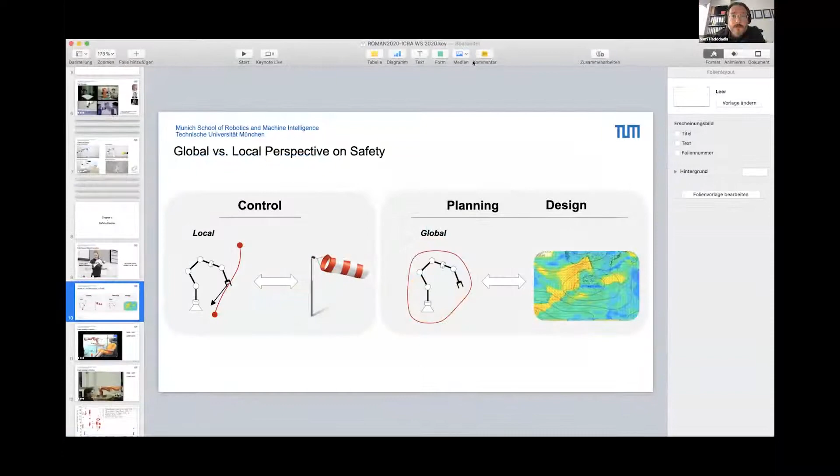Anyway, the safety work we did 15 years ago was essentially the first human-robot collaboration experiment in terms of crash testing, understanding how dangerous robots that interact with humans could be, and using standardized crash testing devices.

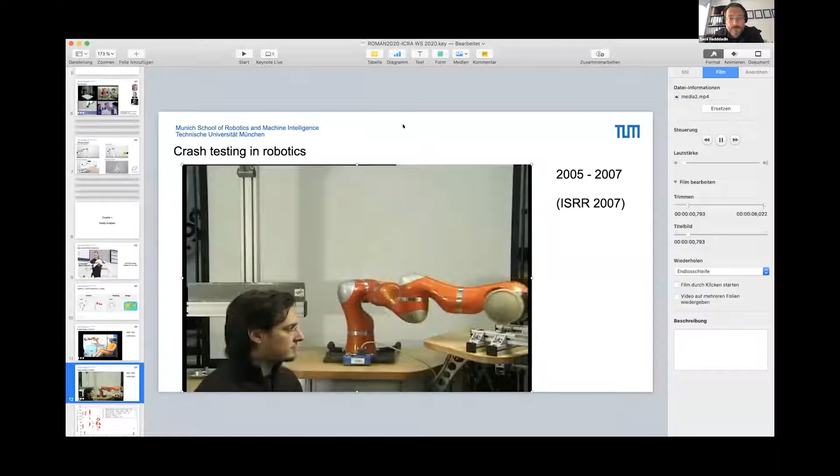We did some experiments with humans—this was me much younger and much more stupid, doing experiments like this. I guess some of you know these videos. This was the first basic attempt to understand whether robots designed for safety were actually dangerous, or fundamentally safe.

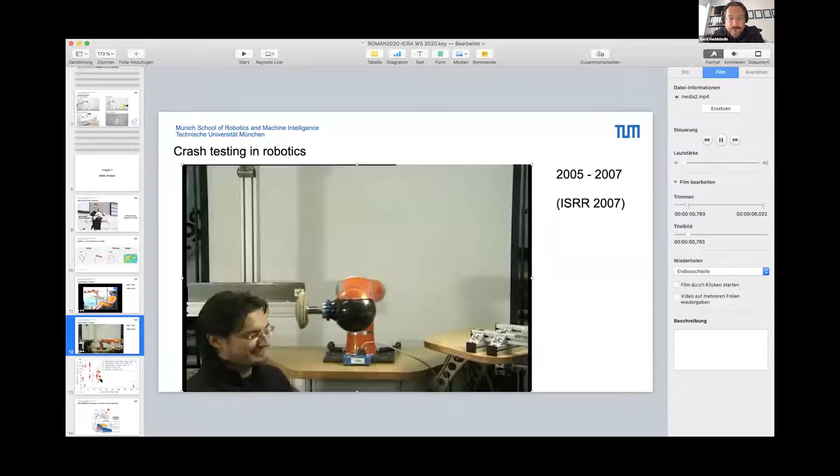We ran collision experiments trying to understand the fundamental injury that could occur in the worst case, especially in this particular case you see here.

One thing we did over the last years was to put together all the safety data that has existed for many years of injury research, not only in robotics but especially in automobile crash testing, injury research in biomechanics, and so on and so forth.

We've put together 70 years of research, more than 2,000 publications were screened that finally made it into some of the works, to try to understand: can we actually leverage all that knowledge in biomechanics research and put this together into one map that lumps together impactor mass and impact velocity, and what injury would occur by means of what we call quantifiable biomechanics-based injury rating.

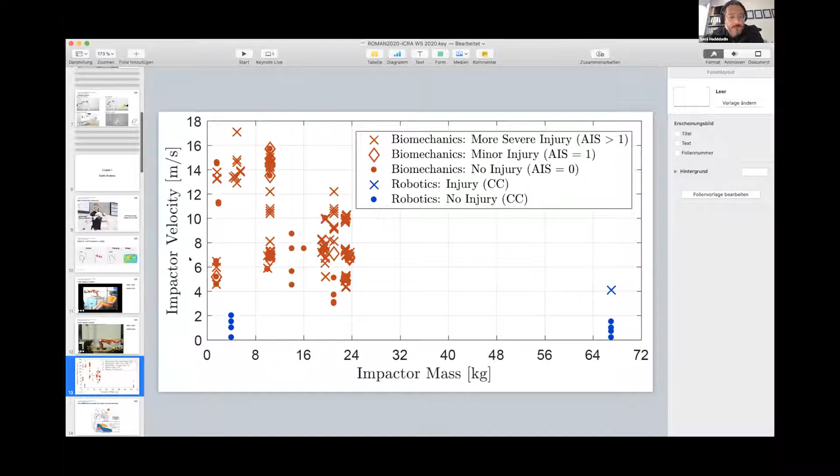This idea of trying to understand impact velocity and impact mass and putting them into one fundamental framework is what we call the safety map or the mass velocity scale. It essentially puts the robot dynamics into one plot, which we published two years ago, combining the robot velocity and the robot reflected mass into one dimension, and the other dimension is the human body part, which runs through this understanding of human injury and can be plotted into the same plot.

The intersection between these two areas is where this particular robot can, in principle, harm that particular body part. This brings together human injury understanding and robot dynamics into one representation that is fundamentally physically motivated, without any fundamental assumptions or the kind of weird calculations we've seen over many years on how to bring these two together.

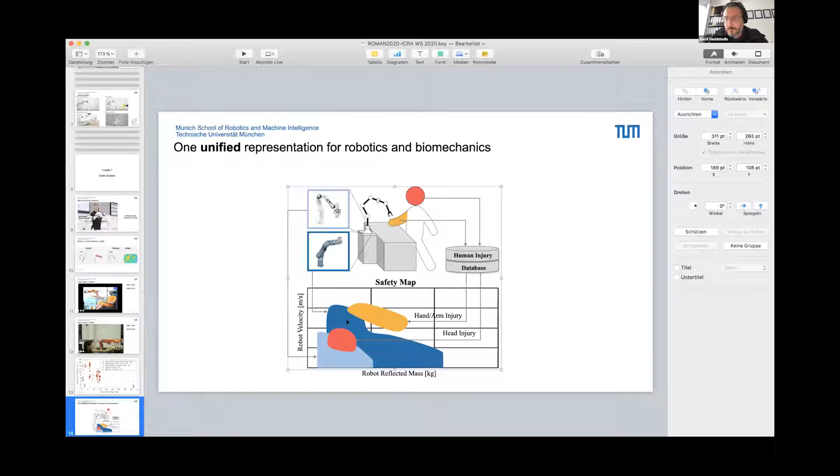This really unifies on very fundamental energetic properties, which gives us the chance to understand the global properties of a robot. Here are two examples: the lightweight robot 3 we did back then at DLR, and the Puma system, plotting the inertial properties and putting them together with the fracture forces of the frontal bone of the human forehead.

What we see here is that for this particular surface we're assuming in this case, no injury can be generated according to all existing biomechanical data for the entire range of motion, given in this particular example with no additional payload for the robot.

This shows that you can bring them together at the design level. You can plot the inertial properties of a robot over its entire workspace and then intersect this with biomechanical injury data. This gives you a notion of how dangerous a robotic design fundamentally is in its inertial, velocity, and impact curvature properties.

So now that we have some tools for making robots safer in motion and in design — which I unfortunately couldn't show you in all the pictures, but I think the idea became roughly clear.

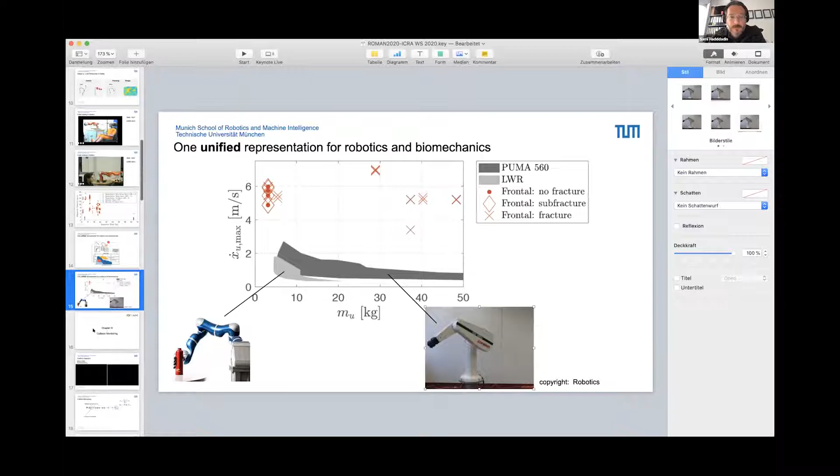One very important aspect is the monitoring of collisions, which many of you have probably seen before. Many years ago, we did basic monitoring work, collision detection and reaction, based on what we call the Momentum Observer, together with Alessandro De Luca, for dynamic impacts but also very sharp impacts.

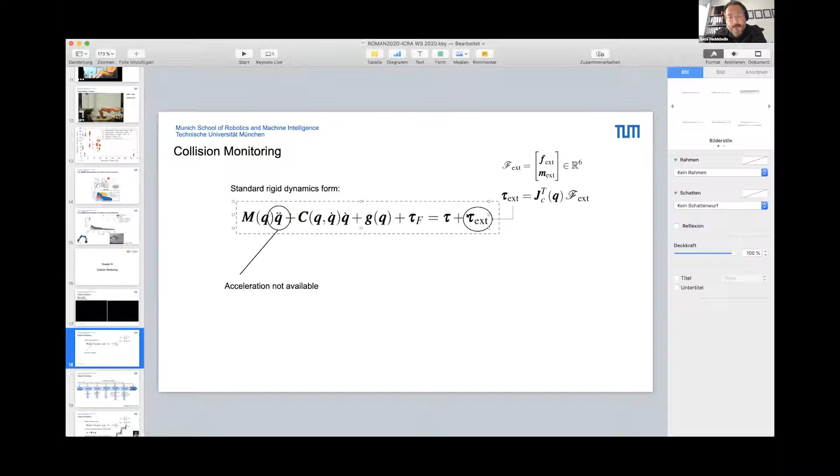The idea was essentially that instead of solving the dynamics equation algebraically using inertia, we put together a so-called momentum observer. Because we don't typically have acceleration available in robots, it estimates the external torques from external collisions via this momentum observer, giving us a pretty accurate estimation of the external torques in generalized space for all the monitoring and estimation you've seen so far.

A couple of years ago we introduced the so-called collision monitoring or collision event pipeline, which tries to bring organization to the whole problem from pre-collision to post-collision: starting with detection, isolating the contact, monitoring the contact forces over time, then classifying and reacting to it, which is somewhat a low-level machine learning and planning problem. We've been doing these things from the beginning.

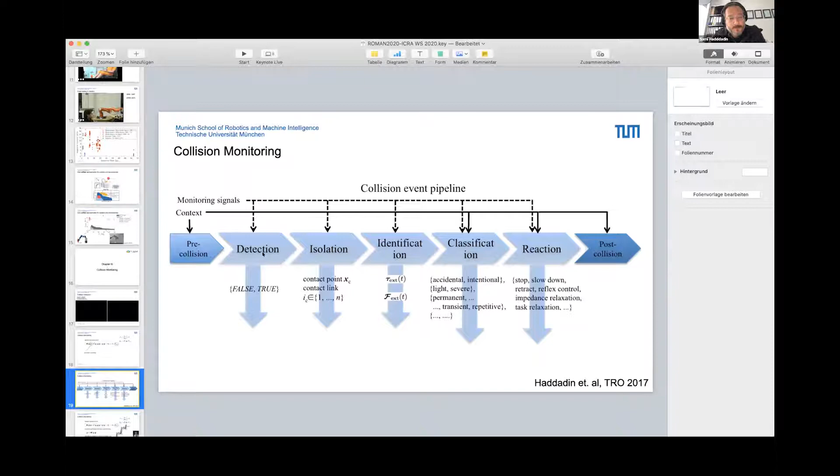However, there's still a lot of work that needs to be done. But I think so far it's safe to say detection, isolation, and identification were roughly solved, also commercially, and have been introduced into all kinds of commercial applications on different robots.

Here you can see some of the basics. Instead of just using Lagrangian dynamics, we reformulate everything into momenta space, introducing what we call a momentum observer — essentially a reduced order disturbance observer in nonlinear form.

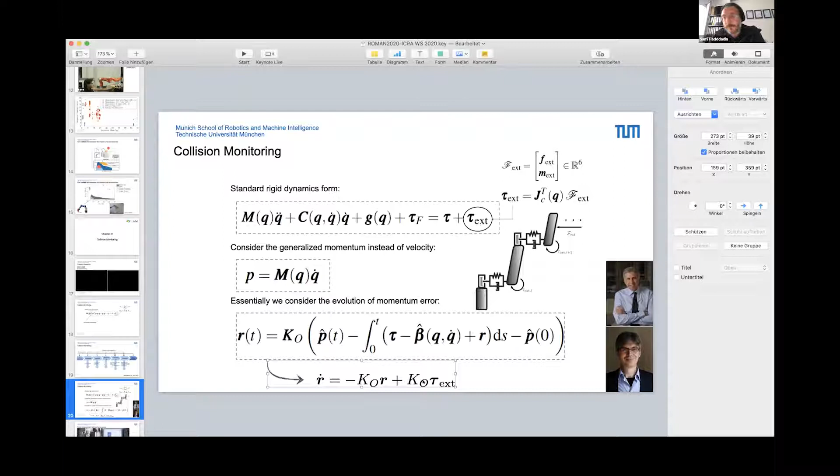And then what you can show, if your models are quite accurate, is that without the need of acceleration measurements, you end up with an estimator that essentially gets the external torques as a first order filtered version. So as nice as it gets, given that you have no acceleration measurements, what you can get is essentially very accurate contact measurements with this system.

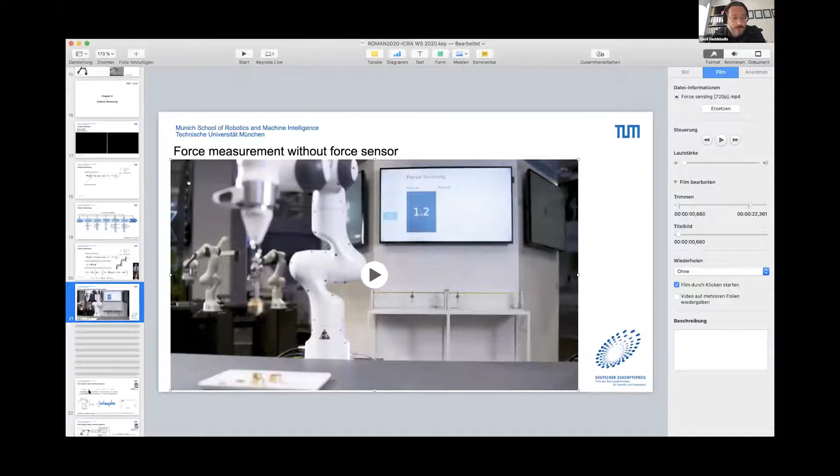However, if you look at these methods, what you typically get is some limitations, even though they work also on a very nice practical level. They typically have some noise, which gives you some thresholding and also some lagging, because it's a first order system we obviously get some lags, so non-ideal behavior in terms of collision detection and monitoring.

So we did put some work into trying to understand: can we, instead of using this classical observer-based method, actually shoot for the direct method? Obviously we all know that we don't have acceleration measurements in the systems. So we asked ourselves, what can we do in order to get rid of this whole observation, lagging, and thresholding problem?

And obviously the solution sounds a bit naive, however it was technically not that easy: to get some accurate estimation of the velocity and the acceleration in the joints, and then basically use the algebraic estimation of the external torques. However, numerical differentiation has been a problem for many years, and this obviously increases the uncertainties in the residual R. So we need some large thresholding and filtering compared to what could be ideally possible, especially in high dynamic collisions.

So what we came up with was essentially a new way of looking at the acceleration, and we essentially tried to make use of IMU measurements to get, via a nonlinear estimator, fusing with standard proprioceptive sensing, an estimate of the velocity and the acceleration as accurate as possible.

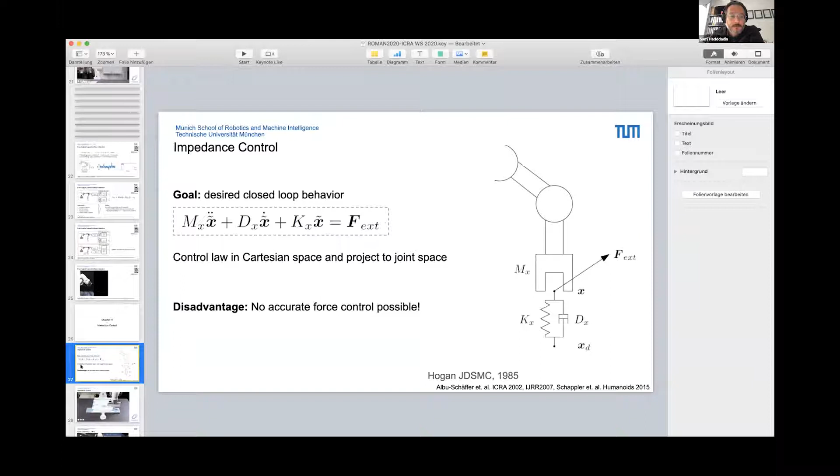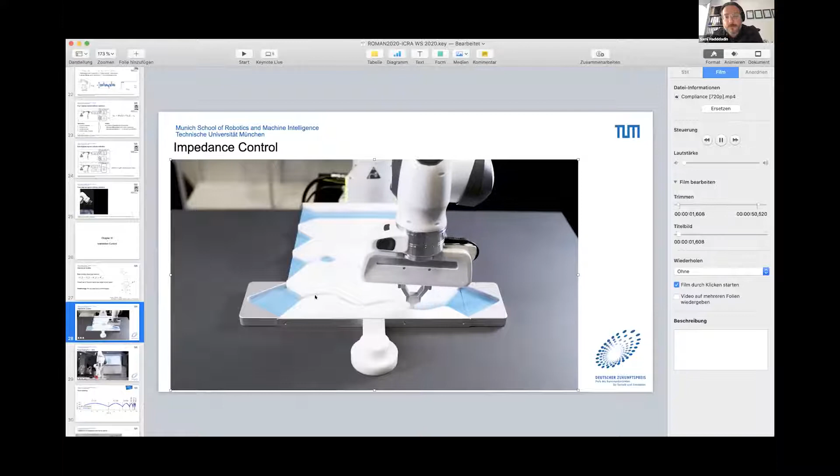The fourth part I want to talk about quickly is interaction control. We all know works like impedance control and admittance control. However, one of the main limitations of these works is that, despite we can essentially be compliant without knowing the environment, which is obviously a very nice property of a robot, there are still issues.

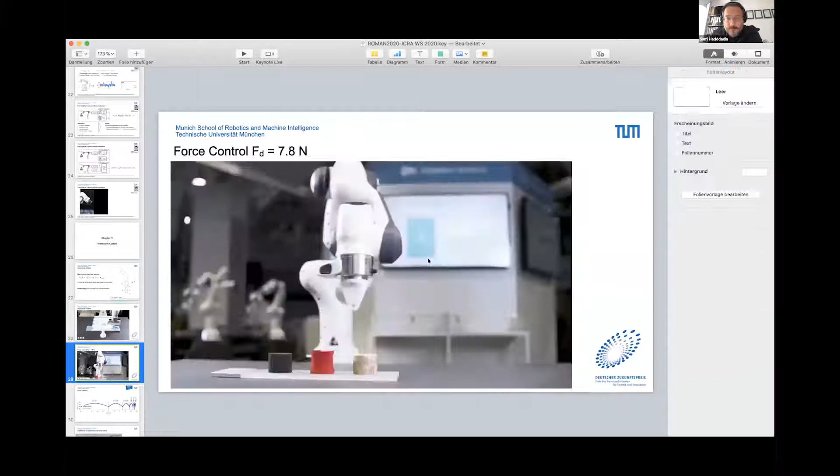We can obviously do force control also with these systems, regardless of the compliance of the environment, which obviously in interaction with humans is very important.

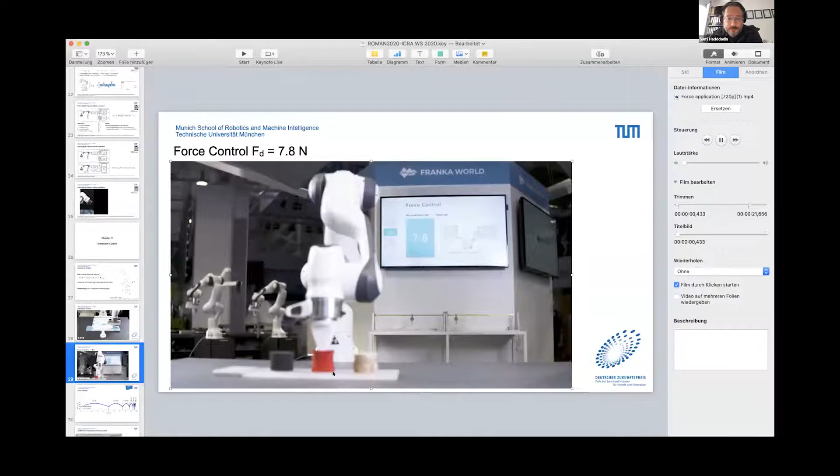Safe contact force estimation and also control: not only being soft, but really accurately regulating the contact forces at the same time, which is, I think, very important in various applications, and obviously doing this also over many kinds of various time frames. So we can see here up to 3 Hertz of accurate force control with internal measurements.

However, one thing that we all encounter if we do force control or impedance control and we want to regulate forces, we kind of have inherent pre-storage of energy in the springs of the joints, or we have inherent undefined contact forces if we remove the contact, obviously in the force control test. So these are two of the fundamental problems. Force control basically runs into the ground. Impedance control is a preloaded spring that then releases instantaneous energy and is highly unsafe.

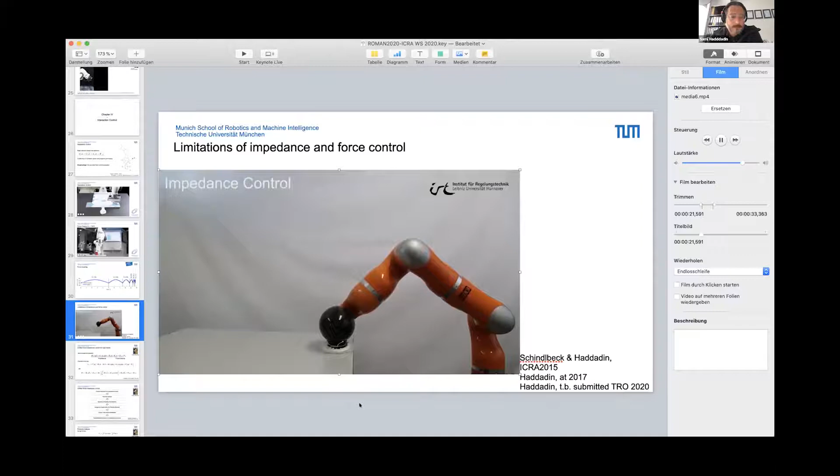So what we've been doing over many years now is to fuse basically impedance and force control in order to get the best of both worlds. However, both have significant limitations in terms of safety if you want to interact with the environment. So if you want to come up with a very naive control law, basically fusing impedance and force control together, then obviously you get both problems I was just showing you. Both of them would be unsafe in terms of contact loss, for example.

So what we put together was starting with this naive force impedance control and then running through what we call a passivity analysis and contact stabilization test to essentially look at the so-called ports that can potentially destabilize force, respectively impedance controllers in these hybrid setups where you don't only want to be compliant, but also very accurately regulate the forces. And we ended up with what we call the passivity-based Cartesian force impedance controller.

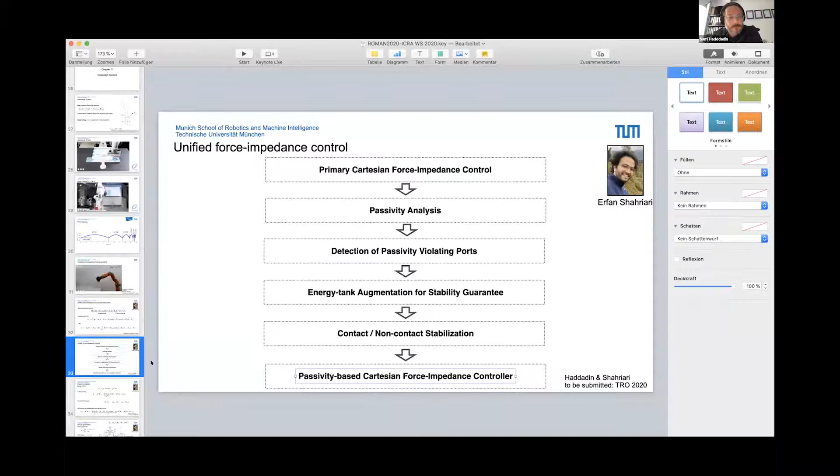This system essentially looks at the storage function of the system, this being the storage function of the tracking error. And what we can see there, if we look at the time evolution of the energy, so the power, we have 3 ports that are potentially unstable. And the nice thing is this is not only there for rigid body robots, but also for compliant robots, for flexible joint robots. So this is a fundamental aspect looking at the feed-forward forces that we want to apply on the velocity, the desired velocity in the forces, and the desired velocity in the external forces. So these are 3 ports we need to take care of in order to stabilize these systems.

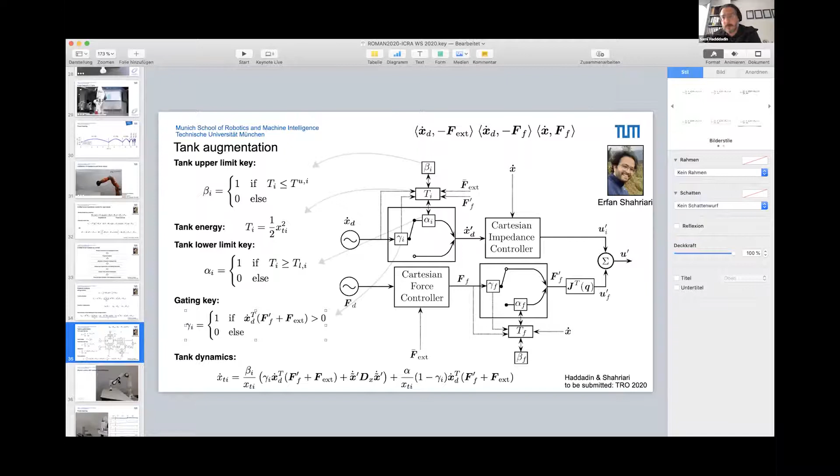So essentially putting together a tank-based controller that looks at all these different ports. So as I said, 3 ports, where we essentially monitor the energy and reduce it out of the system if we run into certain problems that we didn't come up with. So what we see here now is how these systems can deal with this problem. We have accurate force control, and despite loss of contact, the system is able to regulate very accurately the contact forces without destabilizing or being unsafe.

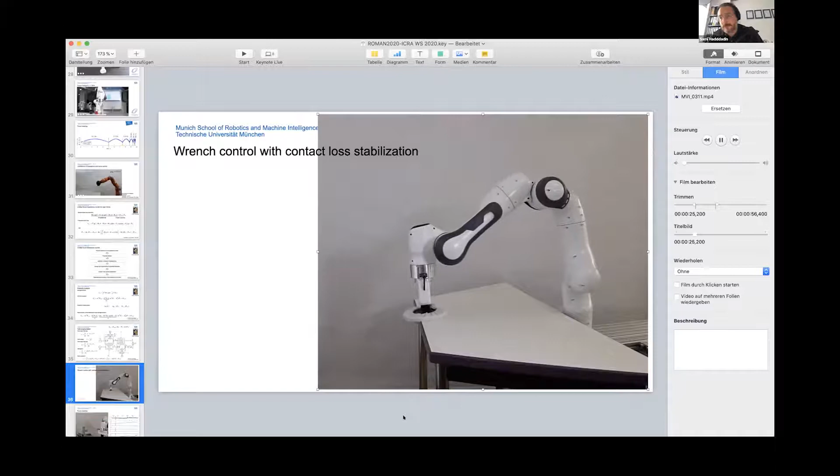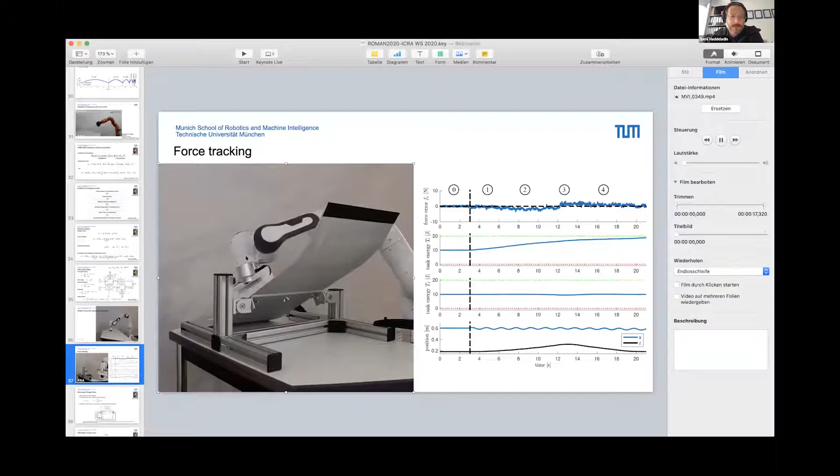So this kind of energy regulation that I was now running through so quickly is very important to not only regulate forces accurately, but also deal with these unstable tasks that you see here. And what you can see in the upper plot is an accurate force controller. The force error is below 2 Newton, despite the robot having no idea how the environment looks, and this highly unstable zigzag that you see here.

So what we have then been developing further is what we call the valve-based approach that tries to regulate the energies that you give the system depending on the task. And with this, you basically get a gain scheduler, not in terms of control gains, but in terms of energies in the task.

And this is the last thing I want to talk about because otherwise I would be running out of time. So what we've been working on over the last 3-4 years, and we are really pushing this a lot, is: can we actually have robots interacting with humans in multiple directions? For example, moving in one direction establishing a motion control task, and in the other trying to establish a contact force, and then trying to regulate the energies in the system so that we can keep the task.

So try to do it as optimally as possible, be safe, but at the same time budget energies along the different valves, as we call them, and then have a gain scheduling approach that tries to prioritize on energies and not so much, as in classical control, on velocity, in kinematic control, multi-priority controllers, or in multi-stage controllers with various torque tasks, for example. So we try to now budget energies instead of kinematic or force stages.

And so far this seems to be working quite nicely because it's very easy to budget energies and learn energies also during iterative learning processes, which could also be a way to fuse together with reinforcement learning, but that's a totally different story.

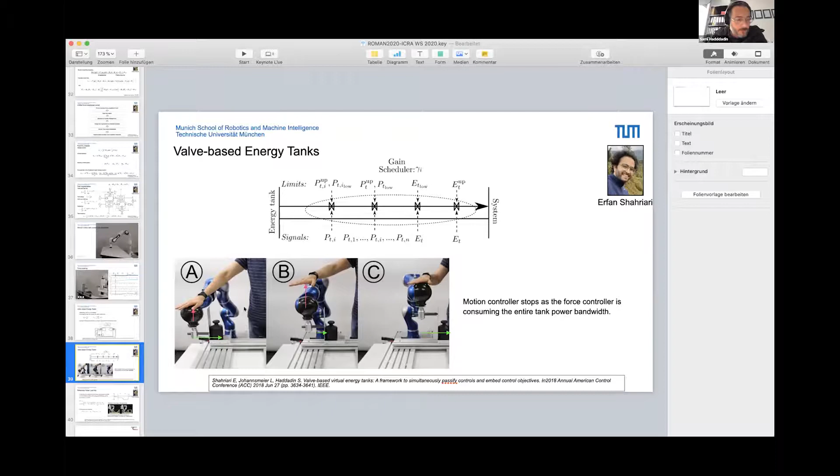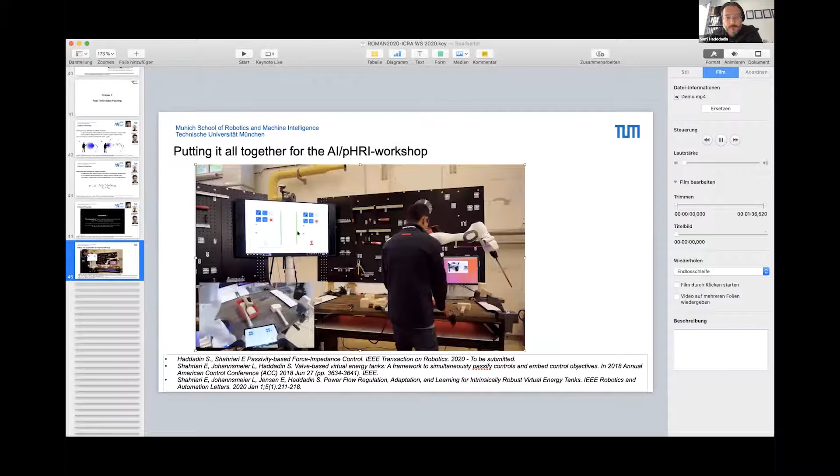And I think I just want to close with a last video that tries to lump things together, showing you how these systems can then be used for doing various tasks and have some energy budgets, which you see here. So we essentially give robots an energy budget. So you could now connect batteries in some sense, and they would basically be able to plan their own battery status with this approach and make sure that they don't exceed the energy that was given to them.

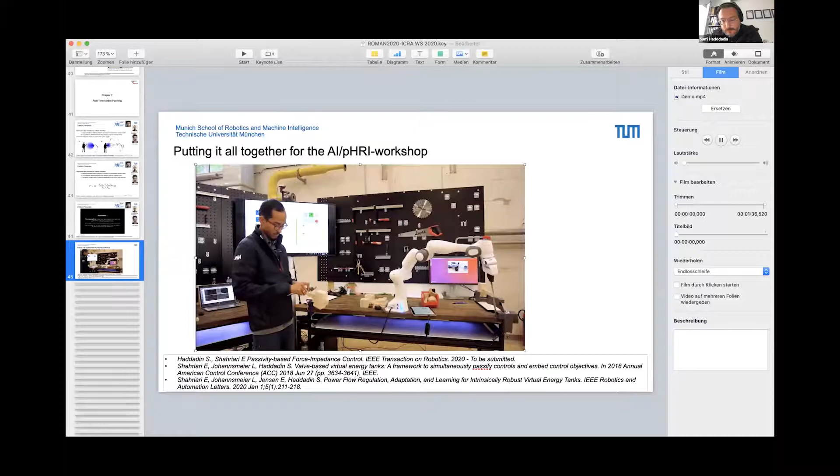So this robot is now basically doing a filing task. And in a way that, despite the robot not knowing how long he's filing, he will now basically detect the contact lost. And then, as you see here, starts now with the thing again. So this is now some low-level intelligence you get into the system.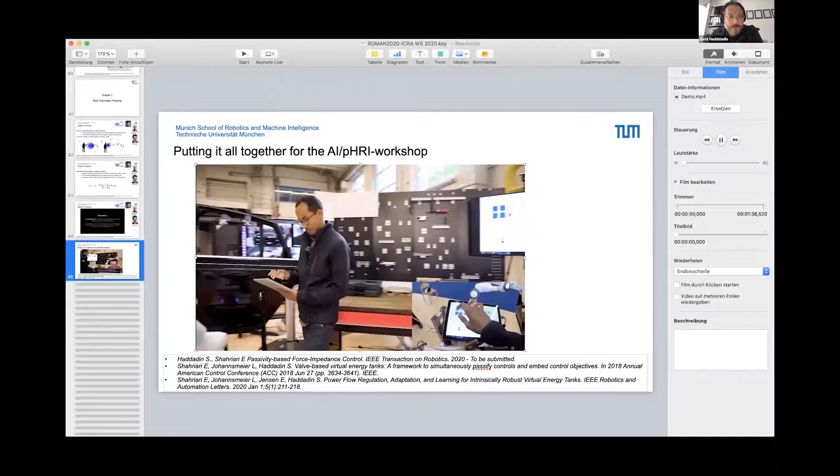And on the other side, what you see here now is a robot that is doing a polishing task and also having the same capabilities, interaction, safety, but also dealing with control tasks based on energy budgets. And with this, be able to deal with all the uncertainties and all the different things that you cannot specify a priori in a task.

So this is something you see here now on the left side. So the robot is now doing the polishing with the force controller, and then basically detecting that the end was reached, and then using this as a feedback to replan. Okay, that would be the last thing.

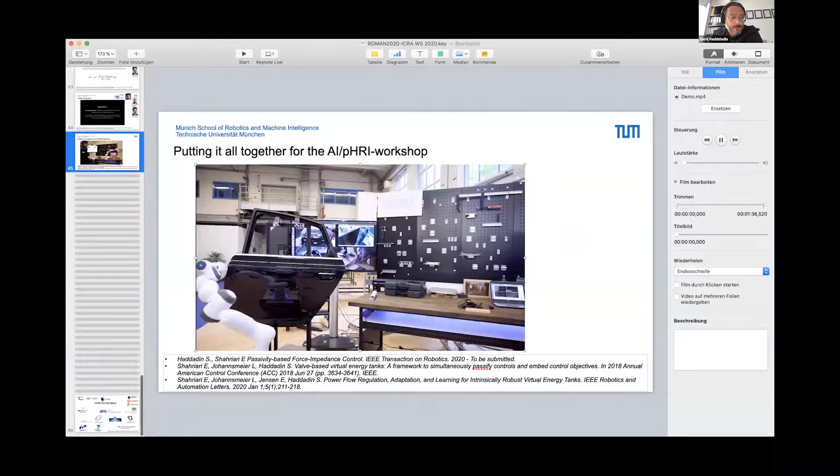Thanks a lot. Thank you so much. It was a quite interesting talk. So sorry that we lost the first part of the... Don't worry. But now we have a few.

Yeah, we have at least 2-3 minutes for a few questions, and we have one first question: how do you determine the value of the tank to ensure safety in human-robot interaction? These might depend on which human is in the vicinity and which body part, frail versus a sturdy human, for example. How can you modify the value of the tank at runtime without generating instabilities again?

Yeah, okay, that's a very deep question, I guess. So in some sense, whoever asked the question caught me, because this is some prior knowledge I would assume to be given from all the great perception people. This is, I guess, the prior information you need to be sure that this exists. So knowing the human who is on the other side, who is your interaction partner, knowing the right level, or at least to some extent, have a conservative estimate.

And in the end, if you don't know that, so if it's uncertainty based, you could always go with the most conservative one. So if you have at least some estimate of what would be the worst case that you could expect, you could always run and be as conservative as possible, meaning you would take the most fragile person, you would take the most conservative thresholding. However, because this is a trade-off, the more you know, the faster, the more high performance you can run. The less you know and the higher the uncertainty, the more cautious you have to be.

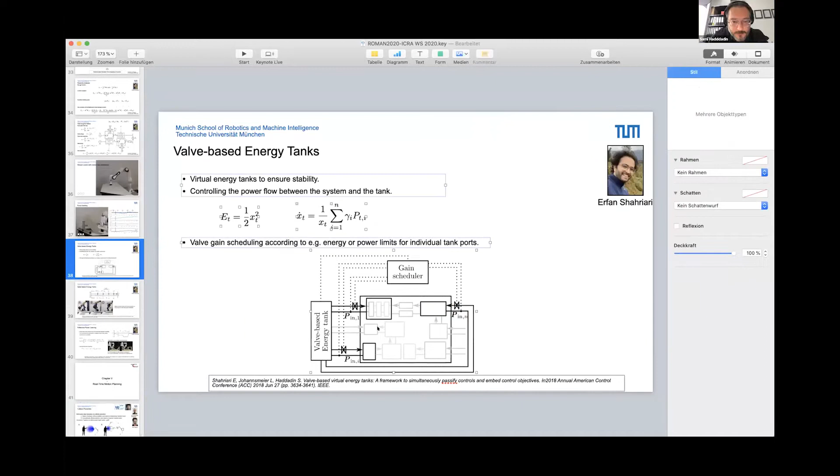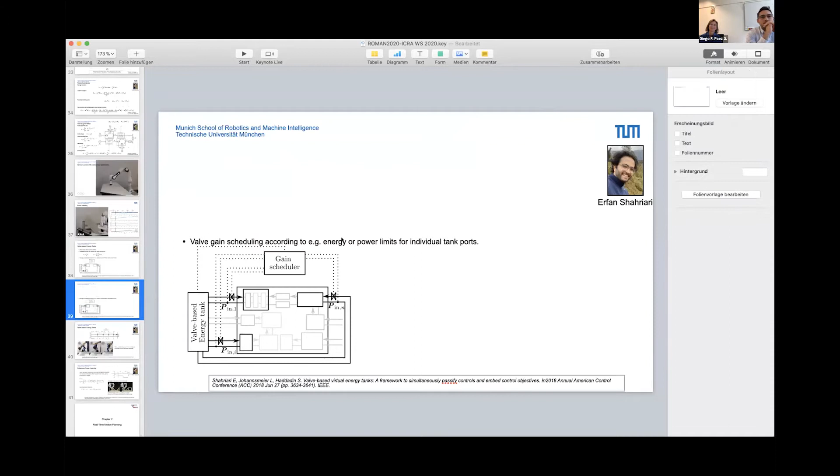Okay, so this is exactly why we are working with gain schedules for the valves. These valves are essentially not switching energy, but they are draining the power flow. With this, you ensure continuity in the behavior. So you ensure stability by the framework, but you ensure continuity by these valves. This is something I think we published two years ago, which is essentially the framework to then get the desired behavior you would like, but it's a design question in the end, I guess.

So that would be my rough approximate answer, however, not yet backed up with full experiments and the full understanding that this 100% solves what you were raising. But that would be my view on that.